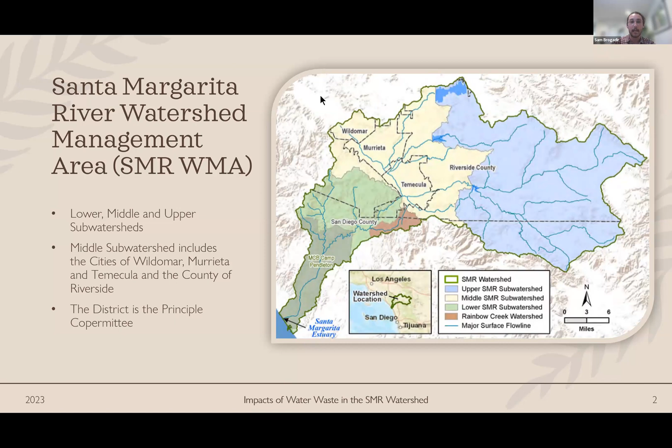So some of the impacts directly related to our watershed are eutrophication and nutrient loading. So I know those may be big words to some people, but the real crux of the problem that we have in our watershed is that we have an abundance of nutrients. And so when you have an abundance of nutrients, typically nitrogen and phosphorus, that can lead to eutrophic conditions, which is an excessive amount of nutrients in lakes or other bodies of water.

And so a lot of these nutrients are from residential sources in the watershed. And that is really because water that is released into the streets, gutters, and storm drains is not treated before it reaches our local creeks, rivers, and lakes. So anything that you see flowing down the streets into those catch basins on the gutters, that's not treated water. It is going to pick up all of the pollutants that are in the street and carry that down to our facilities.

And so nutrient loading, as mentioned, can lead to these eutrophic conditions, which can result in harmful algal blooms, dead zones, and fish kill. So a bunch of environmental consequences that we would hope to avoid. And it's actually estimated that about 65% of estuaries and coastal waters in the US are moderately to severely degraded by excessive nutrient inputs. And so this problem is pervasive. It's not just in the Santa Margarita River watershed, but it is around the country.

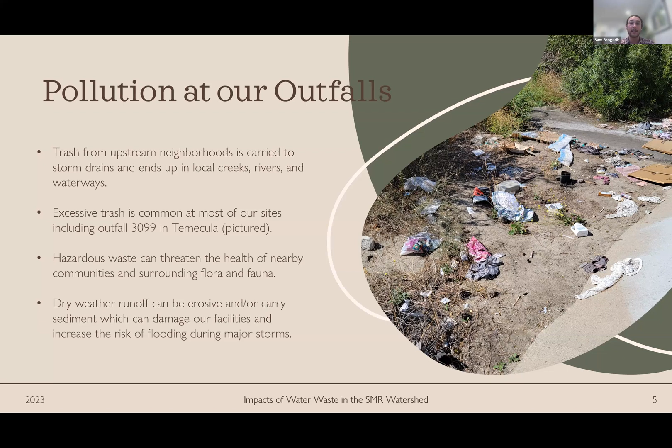So it's really a problem that we see damage at our outfalls from these persistent flows from residential sources, as well as our outfalls littered with trash that's picked up as those storm flows go down from neighborhoods. Some other interesting things to consider is the habitat, right? We are not the only ones relying on the waterways. There's a diverse ecosystem that relies on the water in the Santa Margarita region. And so the Santa Margarita River watershed is actually a critical habitat for a number of endangered species.

And the watershed is also home to about 70 other federally and state listed endangered species. So it's really important that we are taking care of the watershed, not only for our health, but for the health of the species that rely on it. Another really cool thing about our watershed is that it is actually the longest free-flowing river in the Southern California coast. And so that's really neat. It's 27 miles in length of undisturbed river, and that's why it is such an amazing habitat for these 70 plus endangered species.

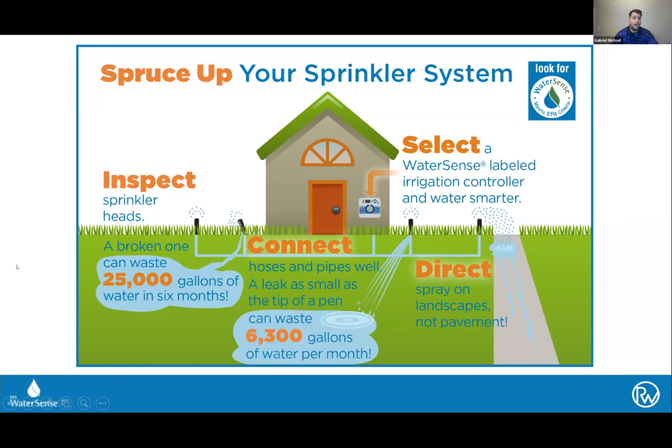So starting with an inspection, if you've never looked at your sprinkler systems through the lens of I'm inspecting it and trying to find out what's wrong with it, hopefully this will help you to understand what some of the deficiencies are that we're looking for, so that even if we're not going to be the ones repairing it, we can take a note or flag it and have someone come out and repair it for us. But an inspection is going to cover basically turning on your sprinkler system, looking at it, and then flagging or marking where there's a problem, and then coming back later and fixing it.

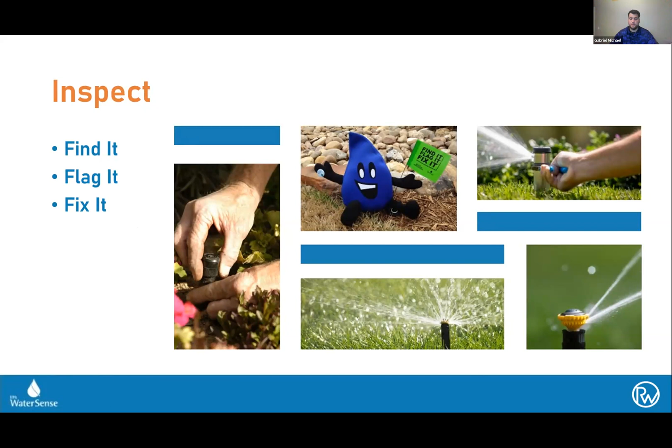You can flag it. Also, if you want to carry like a Sharpie or something, you can write down, hey, this sprinkler is broken, or whatever the issue is, so that when you come back later to fix it, or if you hire a contractor to come out and fix it, there's a lot less lost in translation, and you don't have to turn the system on again if you've already made a note right there in that physical location where you saw an issue.

So the first thing that we're going to look for in an inspection is a pretty simple thing. You don't need a degree in irrigation science to identify above ground leaks. With above ground leaks you will see geysers, you'll see puddles, and that sort of thing can point you in the direction of an issue there. When the system's running, as you can see in this picture here, it's not really clear exactly what might be wrong. And so if you do want to get your hands dirty and see what's going on, you'll typically have to excavate that area a little bit. If that's an actual sprinkler body, or a pipe or whatever's broken, you'll need to expose it and see what's going on.

But leaks can occur anywhere in your system. Fittings will have a joint or a weld that won't hold forever, and eventually will develop a pinhole leak. Around the sprinkler bodies themselves, they'll have issues with seals and that sort of thing, valves. So anywhere you see something like this is obviously a bad thing. And so in our inspection, we're going to, again, turn on every single zone one by one.

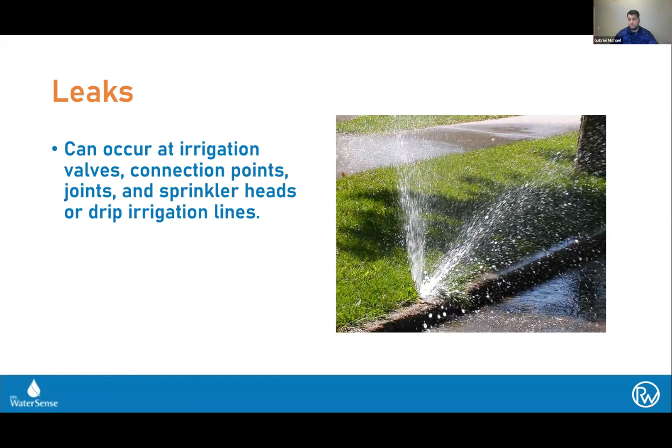And if we see leaks, we can flag it. And if you don't want to get fancy flags, you can mark it with rocks or whatever, however you want to determine where you're going to mark it. But systematically, again, it's best to go through all your zones, turn them all on, and then make marks where there's an issue. So first thing we're looking for is leaks.

But it's good to go through and audit that controller and make sure that it's running the way it's intended to run. And then also just go through, and this is where you can run zone by zone to see if there's an issue. So typical controllers will have maybe 2 zones at the least, all the way up to maybe 16 for larger properties. If you're on a giant property, out in wine country or up in the hills somewhere, you might have multiple controllers.

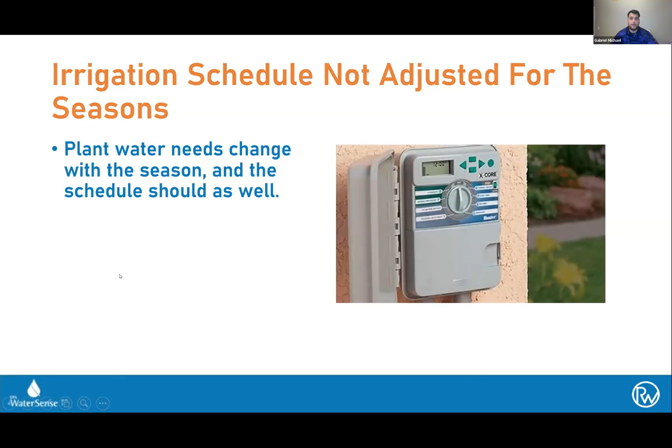You might also have what we call battery operated controllers. So it's not these conventional boxes that are wired in or plugged in somewhere. They might be out with the valves. They look like little hockey pucks, or these little devices that will clip onto the valves. It's good to know where all your controllers are, go and look at them, and adjust the scheduling if needed, depending on what time of year you're in. There's more resources online where you can get base schedules. And then we'll talk a little bit about smart controllers, which are a lot easier to operate.

Another issue that we're looking for during our irrigation inspection is misting. Maybe you haven't seen it on your property, but you've probably seen the typical irrigation zone turn on in a planter or a lawn in a shopping center, and it just looks like this giant cloud of mist. Well, that's not a normal thing. If you see this, this is an indication that your system's running at higher than optimal pressure.

And the issue with high pressure is there's a few things. One is when you run valves and nozzles and all types of irrigation equipment at higher pressure than what's optimal, it has a lower life expectancy, meaning you will get nozzles that break, you will get valves that break a lot faster than the 10-year warranty that's on it. So high pressure is something good to identify.

We actually run that system at a higher flow. So this zone at high pressure will run at more gallons per minute, meaning your property is going to use more gallons per night, but you lose that water in the action of atomization and it wafting away onto your neighbor's lawn or the street or wherever it goes. We pump more water through our meter and through our valve and through the sprinklers, but less of it actually lands on the landscape.

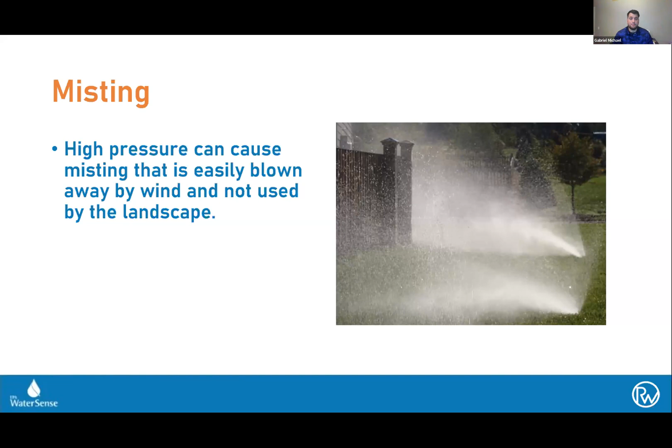So if you're doing your inspection and you see something like this, there's a couple of things you can do to fix it. One is if you have adjustable nozzles, you can adjust them. So you can take the arc from 180 degrees down to 110 degrees or whatever the appropriate arc is to not have overspray onto the hardscape.

Something that also is pretty common is that your misalignment is just the pop-up stem. So let me move my zoom window so I can point. So if you see the stem here, you can actually rotate that. And so if that is moved the wrong way, you can actually grab that and turn the spray pattern to where you want to direct it.

And that's really important because over time, if it gets kicked or run over by a lawnmower, there's lots of things that can change the alignment of a sprinkler just over its normal operation. So if you see something like this, you see overspray, you want to check to see if it's just a matter of adjusting that nozzle, if it's an adjustable nozzle, or you just need to readjust the stem.

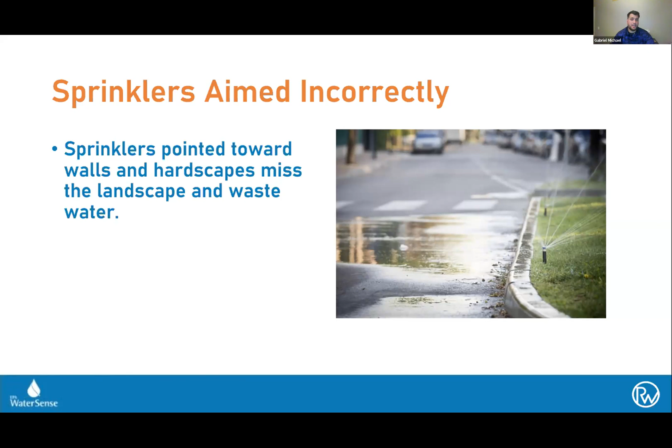So we want to, as best possible when we're doing our inspection, identify places where we have overspray onto hardscape, so that we can limit the amount of runoff that we have. We want to look during our inspection for places of poor sprinkler coverage. So this is an example of something that is not super easy to identify sometimes.

And so this might be something during your spruce up inspection that you're looking around the landscape and you're trying to identify if you have poor coverage. It's kind of hard. I mean, you can put your hand over a sprinkler and look for incoming water, and you can go sprinkler by sprinkler, but in some cases, it's hard to tell if you have poor coverage.

Sometimes it's just identified by the stress that you will see later in the season. It's getting hot soon, so the end of May, beginning of June, you might start to see these stressed out areas. So if you see stressed out areas, you need to figure out what is causing that.

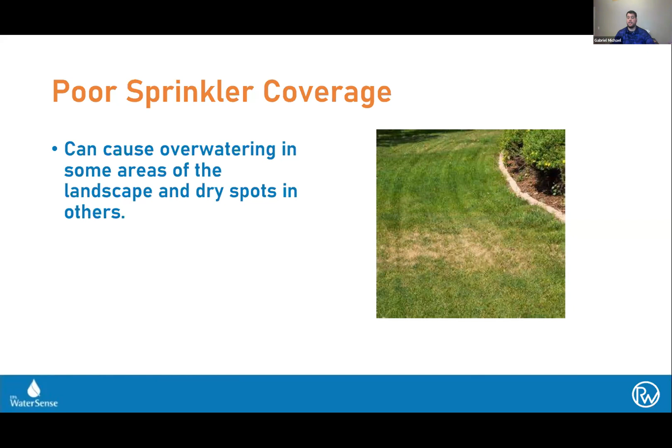But if you see just a dry spot that creeps up, like I said, the end of May, beginning of June, and you see something like this, it's not an indication that you're not putting down enough water. It's just that the water is not spreading out as evenly as it should be. And the best action to take would be to look at different nozzles to make sure that you have proper coverage.

We also want to try to avoid significant overwatering. Now, if you're doing a spruce up and you're doing an inspection, this is something that's going to be easy in some sense if you have a more sloped area, but you want to make sure that you're avoiding runoff off of your landscape. So if you're overwatering, if you're putting water down too quickly, a lot of cases we're putting water down at rates about 2 inches per hour.

Now, the best thing you can do here is if you have, let's say, a 5-minute runtime on your front lawn, you can run that for 5 minutes and see if water starts to run off of it. You can even take it to the next step. You can run the front lawn and have a stopwatch and wait till you see water start to come off of that area and say, okay, I saw water start to roll out of the lawn onto the sidewalk at 6 minutes, 7 minutes. It'll probably be less than that if it's more sloped. It might be 3 minutes.

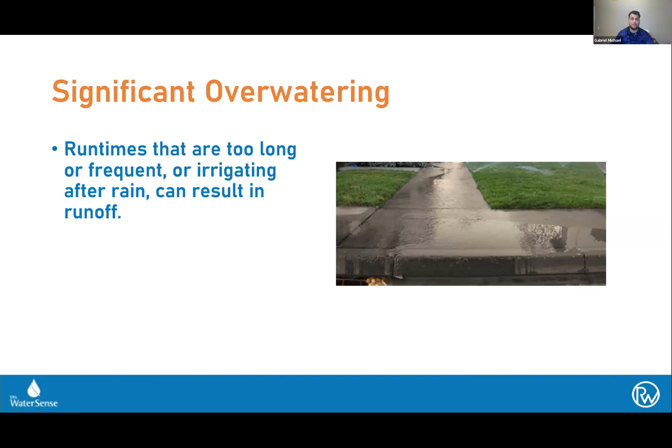So if runtimes are too long or frequent, or if you irrigate after it rains, it can result in runoff. And this is actually a picture where you can see the runoff is going pretty much directly into this little storm drain right here. And that's what we're trying to avoid, all the dissolved fertilizers and stuff that's in there that we're now transporting out to the Santa Margarita. So try to avoid runoff by identifying max run times.

Inspections. So if you find broken heads, place a flag next to it. It doesn't have to be a flag, but these flags are relatively inexpensive. You can buy a pack of them from a home supply store.

They're really easy if you're doing any yard work, not just for sprinklers, to mark where you're going to plant something or whatever. But if you want to put a flag next to it, that way you can come back and fix it later. The best way to go through it during your spruce up and identify things wrong is to systematically go through the whole system, inspect it, flag everything, and then come back and fix it later.

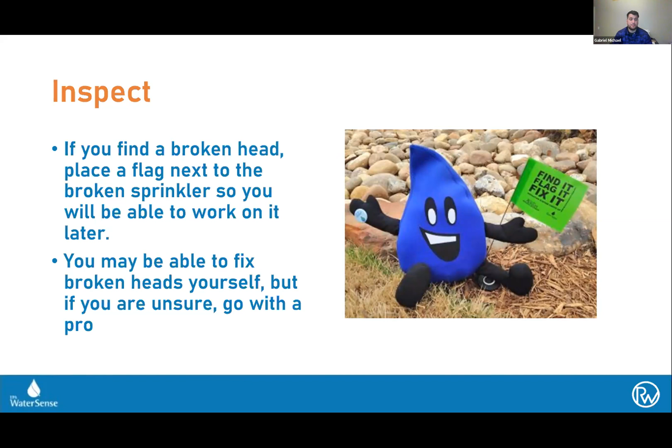So you may be able to fix a lot of this stuff yourself. YouTube is a great resource. A lot of irrigation sprinkler hardware stuff is relatively simple to figure out. It's PVC, so it goes together pretty well. But if you're unsure, you could always hire a professional. And professionals can be found at this resource here. This is an EPA resource.

Look for watersense.epa.gov/pros. You could literally just Google pros and WaterSense label, and you'll find it. It's a database where you can search by zip code. So if you're in Temecula or Murrieta, you could say, hey, I'm looking for a licensed contractor that does residential, all the filters and everything. So you'd say residential irrigation, go, and it will produce a list of names in the area that are WaterSense labeled.

And so just so you know, an irrigation professional that's on an EPA website is not only someone who is a contractor that does irrigation, they also have one or more WaterSense labeled certifications. So they might be something with the Irrigation Association, certified landscape technician, or a qualified water efficient landscaper. So they have a good amount of training to be water efficient and all that if they're on this website.

Look for watersense.epa.gov/pros. So that was our inspection as far as just a general walkthrough, looking for different things that we can identify that are wrong and that we want to fix.

So this portion is about connections. We talked about leaks can occur anywhere, but where you're going to find leaks more often than not is places where there are connections. Let's say you have a 100-foot run of PVC pipe. You can spring a leak in that run, but you'll most likely find that the leak is going to be at the fitting or at the connection of that pipe to another pipe or a valve. So these three things, sprinklers, pipes, and valves, these connections are the places where you're most commonly going to see issues.

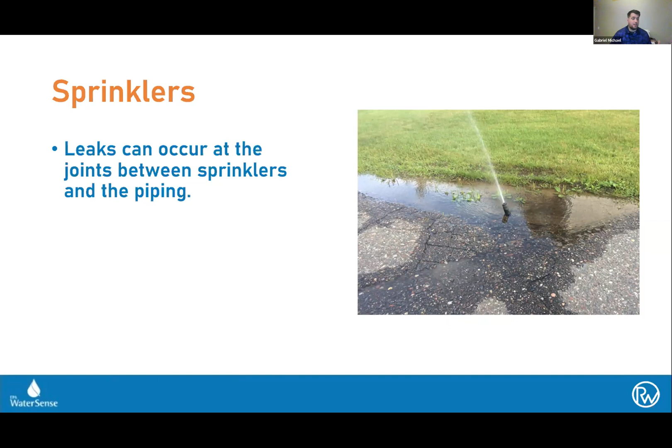So in this picture you see here, this is just a sprinkler that's popped up in a lawn, and it's in this giant puddle. Now, I wouldn't say 100% there's something wrong with that sprinkler, but if you're trying to identify where that puddle's coming from, your best bet is to dig down and look at that sprinkler. Once you excavate the area around this sprinkler, you can let it dry out or pump it out or take buckets and get that water out of there. You can turn the system back on and then look at all the stuff underneath and watch to see where the water comes from. A lot of times it will just be a fitting that is worn, or the Teflon tape is worn out, or something is wrong with the fittings underneath.

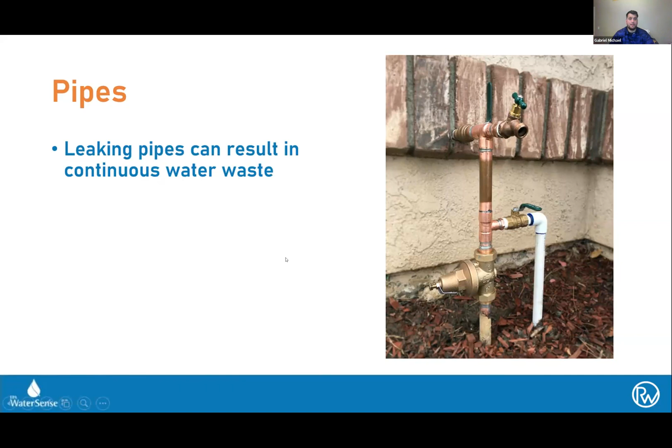You can do the same thing. You can turn off different parts of the property if you have constant movement or a continuous leak, to isolate and see where it is. And again, knowing where this is is a good thing, because then if you do have a problem outdoors, you can just shut off the outdoors and go back to finishing the evening and waiting till a contractor comes, or you decide you're going to go out and repair it, or whenever that's going to happen. Doesn't have to happen right away.

There's the connection of the valve itself to the inlet side and the output side. There's also the solenoid that's screwed on top, so the connections there, and then the diaphragm inside, which moves quite a bit every time it turns on, every night or every other night, or however often it turns on. That diaphragm is going to be moving a lot with constant water pressure on it. So these are something to check to make sure that they're not leaking. Same thing with your point of connection to your house.

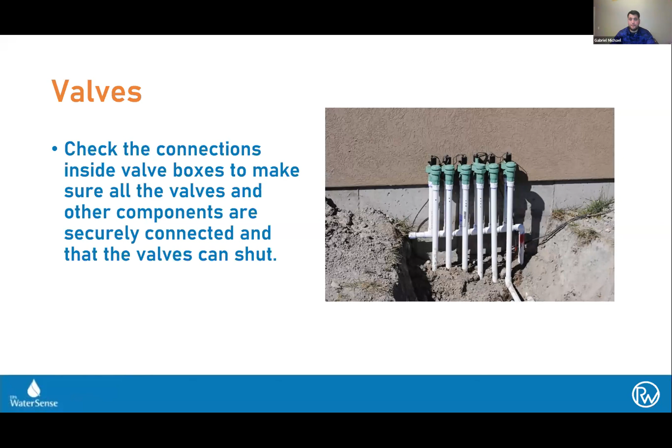So everything is shut, because if you have a loose solenoid on top, you might be just pushing a little bit of water through that valve out to the sprinklers, and it's coming out somewhere downstream, maybe in a bush that no one will ever see. So you want to make sure everything's tight here. Make sure you visually inspect these valves to make sure that they're not leaking. And if you see anything wrong, obviously flag it, and come back and either hire a professional or whatever your plan is to repair the valve.

So now we get into the category of direction, or directing sprinklers so that they are performing properly. We talked a little bit about coverage, and I talked about head-to-head coverage. And that's an important thing about the directing of your sprinklers. So you want to make sure that you have head-to-head coverage. This is a picture where you can kind of get an idea of what the spacing is here. Now, this is something that will be helpful for you to understand at home if you're doing, again, going back to the inspection.

If you're trying to identify if you have head-to-head coverage, meaning this sprinkler would go and spray its water far enough to touch the next sprinkler. I think the next sprinkler is actually this way, but either way, you want to make sure that these sprinklers go and pretty much complement the next head over. And so the way you could do that is you can just find out the distance between these two. You can take a measuring tape, you can pace it. If generally, when you take a step, it's 3 feet, take 3 steps. Okay, that's a 9-foot spacing. Whatever the case may be, you figure out what the distance between the two heads is.

Then you can find out how far your sprinkler nozzles go. A lot of nozzles will actually have on the top of them a number stamped into them, 9 feet, 10 feet, 12 feet, whatever it is. That will give you an idea of how far it can actually reach. And so if you have, let's call it a 15-foot spacing, but I only have a 10-foot nozzle on there, well, then I don't have head-to-head coverage, and there's going to be an issue with performance, meaning I'm stretching the water out a little bit too much here.

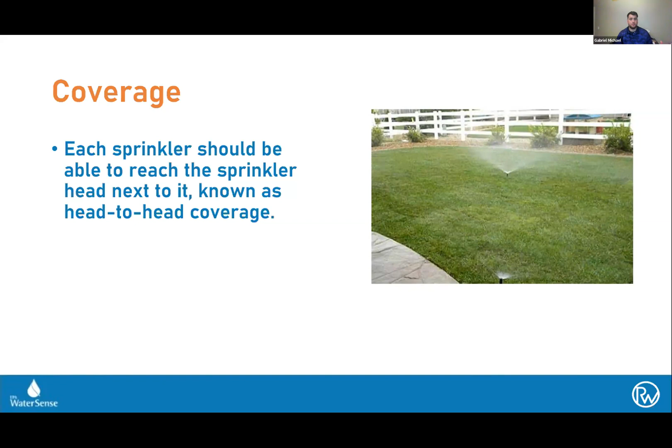In a lot of cases, these spray nozzles aren't very effective past 12 feet or so. So if you have this style of nozzle, this spray nozzle, it's going to be difficult if your spacing is over 12 feet. Some of them might be effective up to 15, but a lot of times just with wind and how fine the water droplets are, it can be difficult at spacings over 12 feet. Then you need to go with a different type of nozzle. But coverage, that is an important one.

Overspray also, we are reiterating the importance of making sure that you don't have overspray, because we don't want to see any water on hardscape. Hardscape has no water requirement. Your lawn needs 4 feet of water a year to stay alive. Concrete needs 0. So we don't need to put any water on the sidewalks, walls, anything like that. Sam already talked about why it's a bad thing once that water goes onto the hardscape and moves towards the rivers. For you personally, just looking at your property in general, this does supplemental damage.

Over time, if you have overspray onto fences, walls, stucco, that sort of stuff, it's going to have an impact on how often you need to resurface it. Everyone thinks, okay, the exterior of my house is made out of weatherproof materials, no big deal. But when you put potable water onto stucco, that's not weather. That's a harder water than what falls out of the sky.

So you get calcification, and we've probably all seen the white stains on fences and that sort of thing. So over time, that's going to also reduce the lifespan of certain building materials. So we want to avoid overspray. We don't want to have X amount of gallons per minute going onto concrete or the driveway or wherever and just leaving the property. That's water that you paid for.

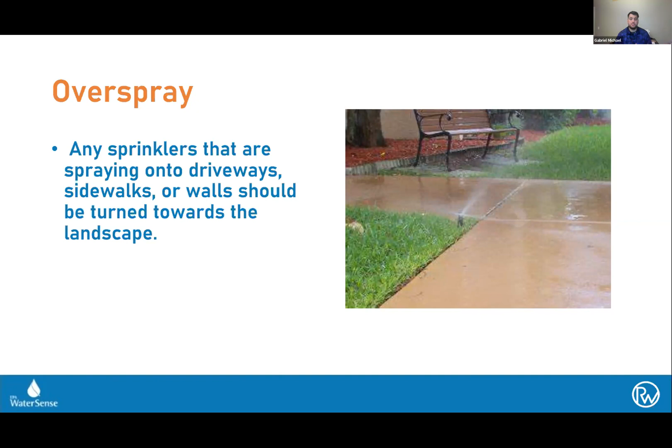So if that is, let's call this a fixed nozzle, I would replace that nozzle. So rather than it shooting 360 degrees, I would have it shoot just 90 degrees towards the lawn. If it's an adjustable nozzle, then you can go and actually with your hand, or in some cases there's tools that come with the nozzles, you can adjust that nozzle so that it only shoots 90 degrees versus 360 degrees all the way around.

So next we have selecting WaterSense labeled irrigation components. So we talked about during your inspection, going through and checking your controller and making sure the run times are correct and all that. But honestly, if you look at managing a conventional controller, so in your garage or wherever your irrigation controller is, if you program in run times that are good for, let's say, this week, those run times aren't going to be any good a week from now.

There's a lot of changes that happen with the plants. We're in a growing season right now, so the water requirements are going to be increased. So there's going to be a certain percent that we need to replenish. The amount of actual water that we need to supply to the landscape is going to be different week by week. So looking at a controller, and again, there's online resources to calculate out run times and all that, and you can explore that. It's a lot easier if you use something called a weather-based irrigation controller.

And weather-based irrigation controllers are something that are much more autonomous. They will just adjust stuff for you. So you take out your conventional controller. If you're familiar with like a Ring doorbell or a Nest thermostat, it's a really similar type of installation. And if you've done that before, you might know that you had your conventional doorbell, right? You took the doorbell off, you wired everything up, and then you connect to an app, and now you have a smart doorbell. So it's really similar for these controllers that go for the residential market.

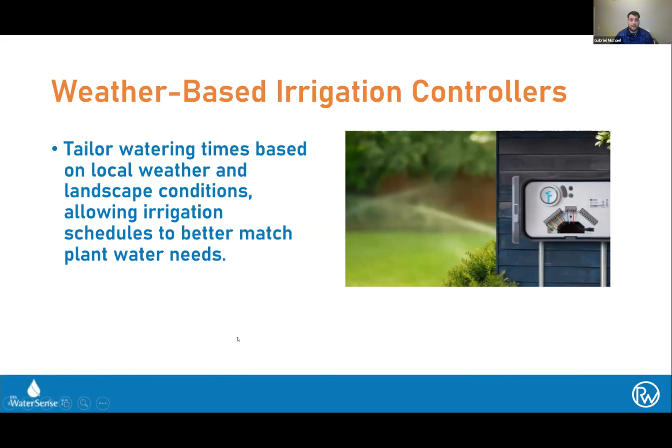And a lot of times, if you have a smaller controller, the rebates are going to pretty much, not entirely cover the cost of it, but be really close to what the cost of these units are. Larger controllers are going to be more, but this is something to look into. Weather-based irrigation controllers, and specifically the Wi-Fi ones that are meant for residential properties.

They also have soil moisture-based irrigation controllers. This is technology that can be used to detect the amount of moisture in the ground. These are a little more efficient, but they're a lot more expensive and a lot more technical how they're managed. If you have a larger property, again, people that are maybe on estates out in the hills and wine country and all that, this might be something that is useful, especially if you're growing avocados and that sort of thing.

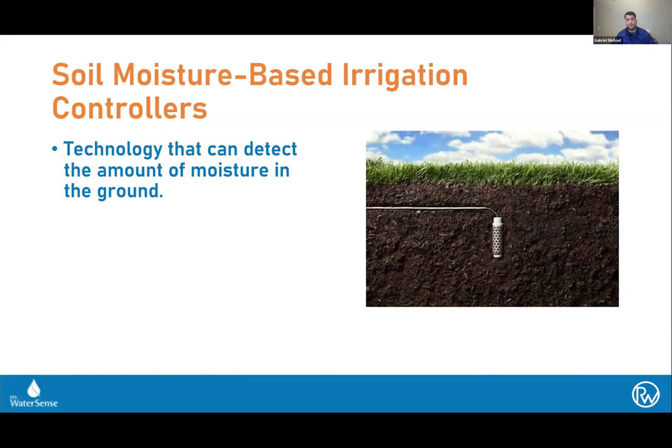If you're on a typical residential property and you have some lawn and some planters, soil moisture-based irrigation controllers are more efficient, but could be a little bit more difficult to manage. So it's really important that we look for this WaterSense label. This is going to tell us that it meets the EPA's criteria. So it's been tested by Smart Water Application Technologies to say, okay, this type of controller, it works.

It meets the irrigation adequacy. It meets the irrigation efficiency. And there's a whole bunch of testing, kind of like UL on plugs and stuff like that. So it's the same type of thing for smart devices. It says this device does what's advertised. It meets criteria that is established by the EPA. So you want to make sure that when you're buying a controller, it has this WaterSense label.

But I think it's more important that when you go out and buy a smart controller, you make sure it's on the rebate list. And so the cool thing is that if you get a controller that's on the rebate list, it's kind of been vetted already. So it's been vetted from the water district, from your water provider. And then it's also been vetted by the EPA because the water providers are only giving you rebates for WaterSense EPA criteria devices.

So if you want a list, you can go to where you get your rebates at SoCal WaterSmart, and you can download the list of all the controllers if you want to. And you can see all those devices, you get a rebate for them and they're WaterSense labeled. And with that, I think we have about 7 minutes for questions.